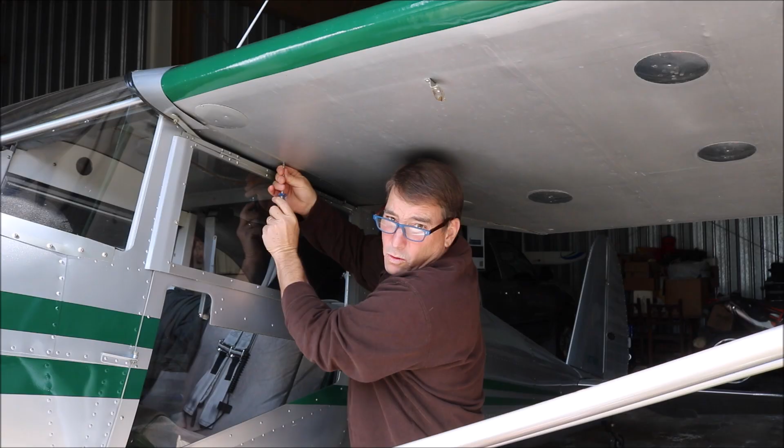We're going to start by removing a couple of inspection panels here on the Mighty Luscombe and showing you a quick review of basic aircraft structures that are similar to the Mighty Luscombe here, built in 1946, that pertain also to the 737 series of aircraft.

As an airframe and power plant mechanic, that's the first thing I did after high school and was one of the best things I did for my career, to go get that rating. A 2-year long program right after high school. I'm able to work on my own aircraft. I'm not able to sign off its annual inspection.

Each year on light aircraft, you've got to open up all these inspection panels and do a thorough annual inspection on the aircraft to maintain its airworthiness certificate. So I can do the work, but I just cannot sign off the annual inspection. I have to get an AI, an authorized inspector, to do that work. We're going to switch over to the GoPro now for its wide angle capability and low light capability as well.

The structure of the wing of the Mighty Luscombe is very similar to other major wing structures, including the 737, and consists of some similar basic concepts. Each wing has a main spar that carries the main part of the flying load, and the wing has a rear spar to handle any twisting motion. Both spars run the length of the wing all the way out to the tip and are attached here at the fuselage in what is called the center section. This whole structure area in the Mighty Luscombe is the center section.

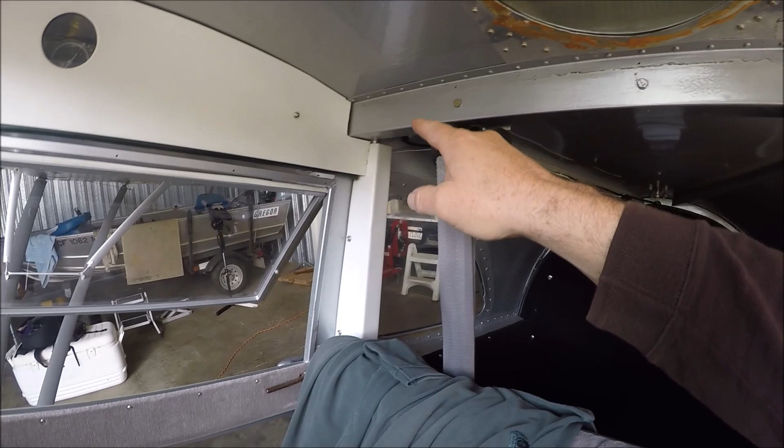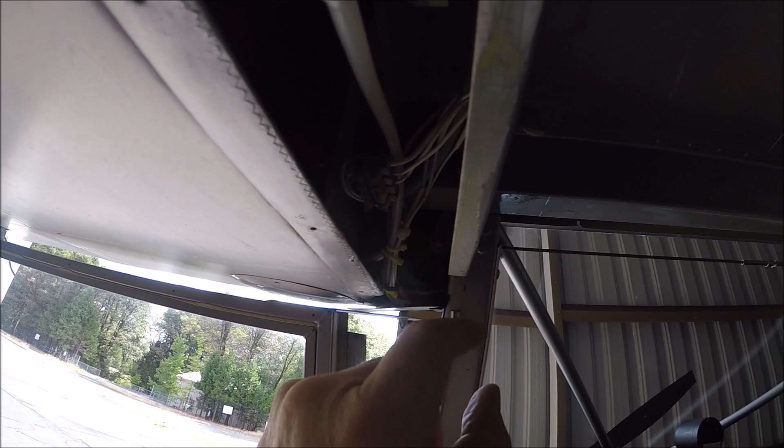Specifically in the case of the, let me close that door. This center section of the main spar in the Luscombe represents the strongest part of the aircraft. It ties in the main spar of the wing with the fuselage to the wing struts and the landing gear. It transfers the load of the main spar through these attach bolts, through this hat section, and across to the other wing.

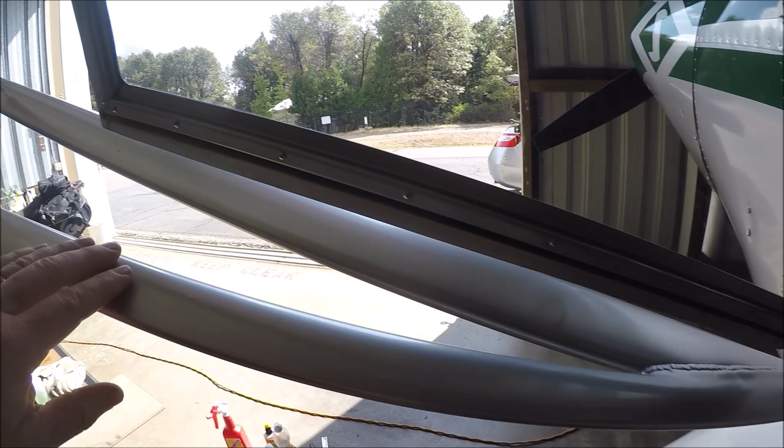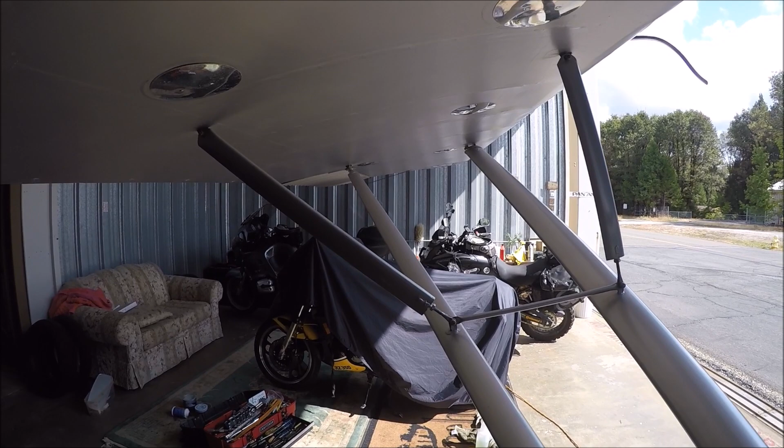This section transfers the load to the fuselage and connects down here to the main wing strut and the landing gear. And this wing strut, of course, attaches to the main spar and the rear spar. This is also where you can control the twist of the wing, or adjust the twist of the wing for wash in and wash out. This main spar attach point also connects to the engine mount.

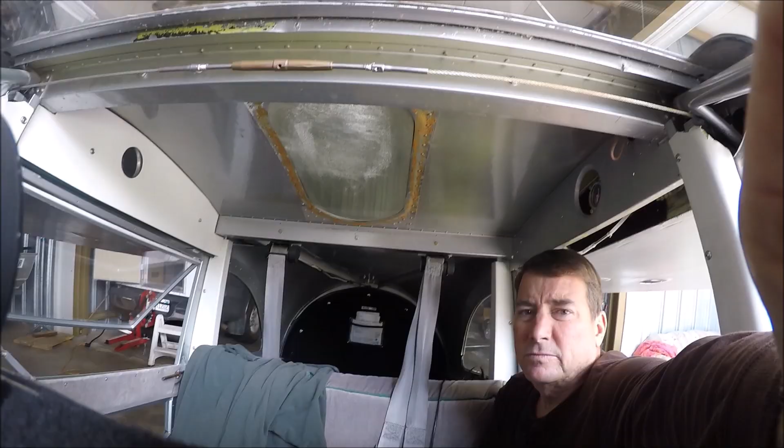And by the way, if you're in the market for an old Luscombe, you've got to look for corrosion. These are all metal, all aluminum aircraft, and these center hat sections, they're called, it's just a simple hat section of aluminum that transfers this load, has an airworthiness directive out on them to inspect these sections for corrosion. In this Luscombe, these sections of aluminum were completely replaced when the aircraft was restored some 12 years ago.

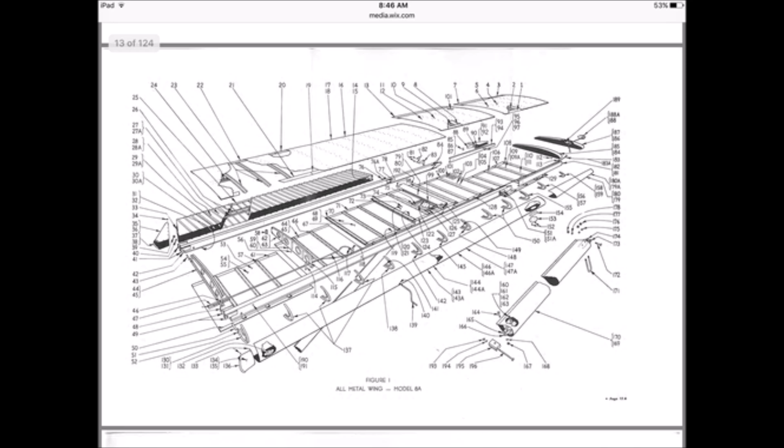Now let's go look at the 737 design and these pickle fork attach fittings.

Since its inception in 1967, the Boeing 737 series has been the most successful airliner in history, with over 8,500 sold worldwide. The launch customer wasn't in the United States—it was Lufthansa in Germany. Like the James Brown of aviation, it's the hardest working airliner in the industry, with over 1,200 airplanes in the air at any given time and one landing less than every 2 seconds.

These aircraft get a lot of wear and tear, especially with the short hauls they fly. Coupled with the fact that there are so many variant models, the 737 has a long list of airworthiness directives, and the cracking in this pickle fork design may soon become an AD itself. More on that in a moment.

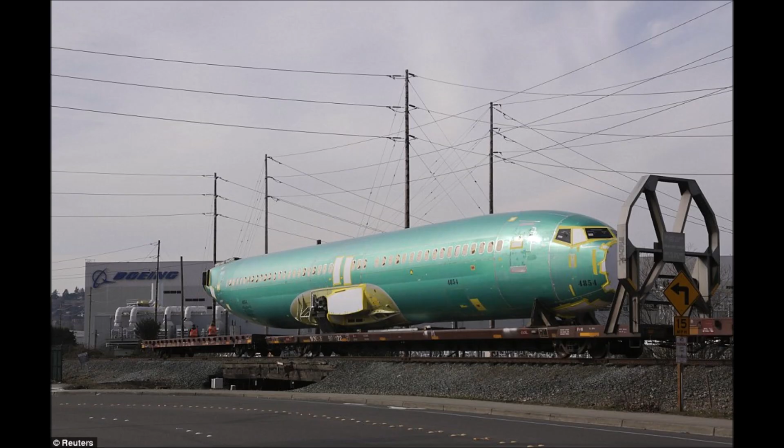First, let's look at how the new 737 MAX is assembled in Renton. The fuselages come 2,000 miles from Wichita without a wing center section. By the way, I have to use the MAX example here because I have no good pictures of the NG series being assembled. The concepts are the same.

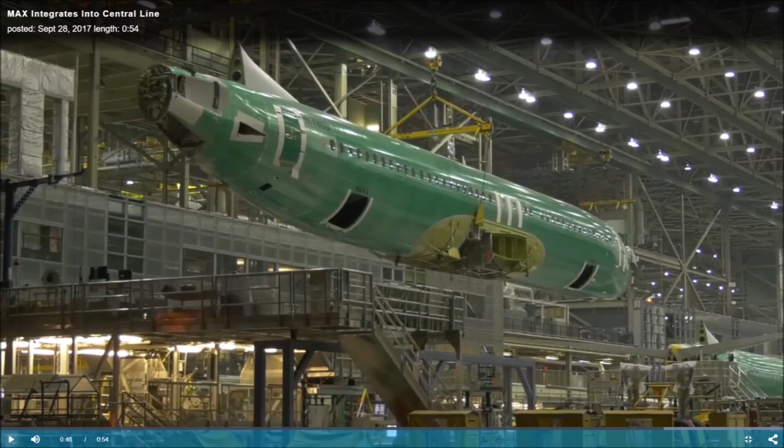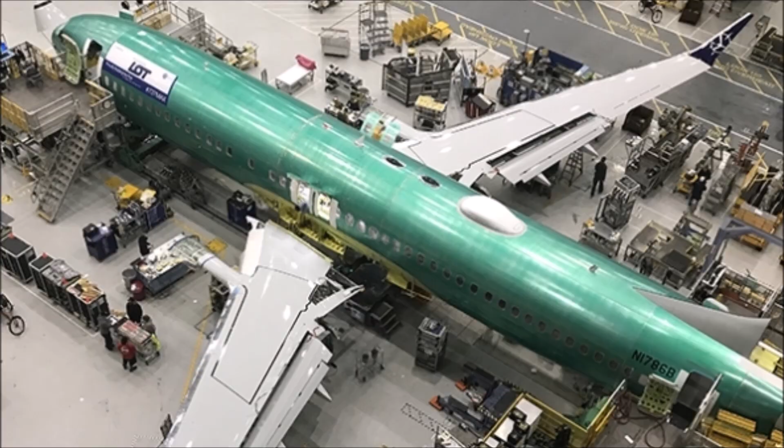Once the fuselage gets to Boeing Renton, all the interior components are added, including a wing center section. The wings themselves are built in Renton, and the fuselage is lowered onto the floor where the wings are attached. This whole assembly process takes about 9 days once the fuselage arrives at the factory, to push the completed airplane out the door.

Now let's take a closer look at the critical wing center section. This is the strongest part of the aircraft, responsible for transferring the forces from the wings to the fuselage and vice versa.

The pickle fork is a continuous assembly that goes up above the windows, wrapping around about a quarter of the circumference of the fuselage. And here's what the pickle fork looks like from a structural analysis rendering.

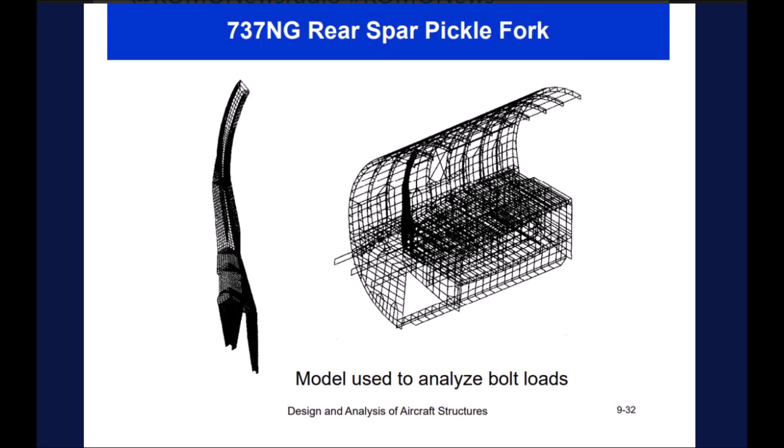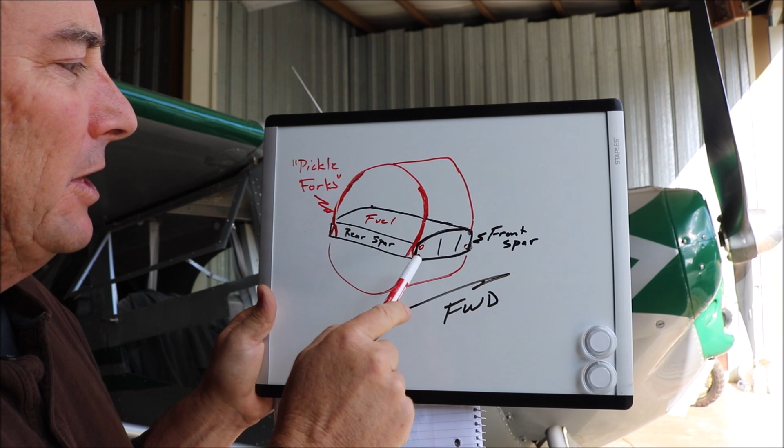Using my own crummy graphics here on the whiteboard, with the aircraft oriented forward this direction, here's your wing center section, front spar, rear spar, and the fuselage. And here the pickle forks attach the center section to the fuselage, transferring all of those forces.

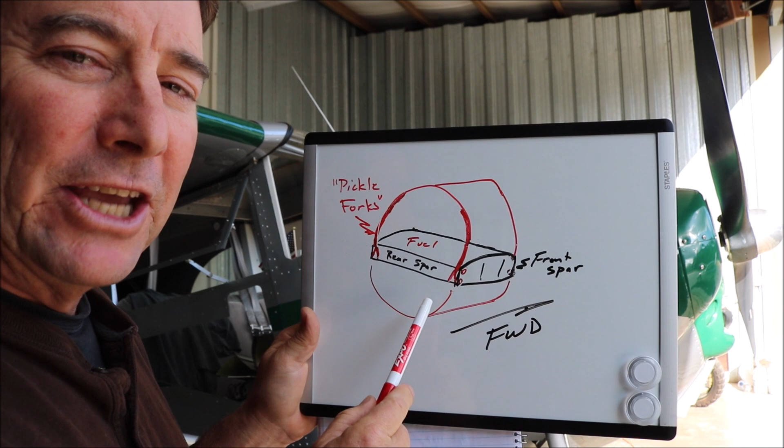A side note: as an operator, the fuel located in the wings is called the main fuel tanks, and the center fuel tank located in the center of the aircraft is to be burned first. You burn that fuel out of the center of the aircraft to avoid excessive bending moments on the wings. That's your standard fuel management plan on all of these airliners.

This issue was discovered on an aircraft they were converting for freight operation in China. This aircraft had somewhere around 22,000 cycles—a cycle is each landing and takeoff, each inflation of the fuselage, if you will. These pickle forks are supposed to be designed to last the lifetime of the aircraft, considered about 90,000 cycles, so less than a third of the lifespan based on the number of cycles.

These pickle forks are beginning to show cracks, and they found cracks in 3 aircraft out of 15. Again, this only pertains to the 737 NG series of aircraft, those with a high number of cycles. This has nothing to do with the MAX at this point. Here in the States, there are 3 airlines operating NGs with at least this much time on them: Alaska, Delta, and Southwest Airlines.

So basically, the system worked. Operators or engineers out in the field discovered cracks in the pickle forks they were working on at Boeing, and they immediately went up the chain of command with their concerns, and that information got right straight away to the FAA. Now today the FAA is acting on it.

So we'll keep you posted on how this plays out. This should become an airworthiness directive very soon, and when we get the detailed information we'll certainly let you know. The airworthiness directive will give the guidance required to get these pieces inspected properly to maintain the airworthiness of the aircraft. This inspection could be pretty straightforward.